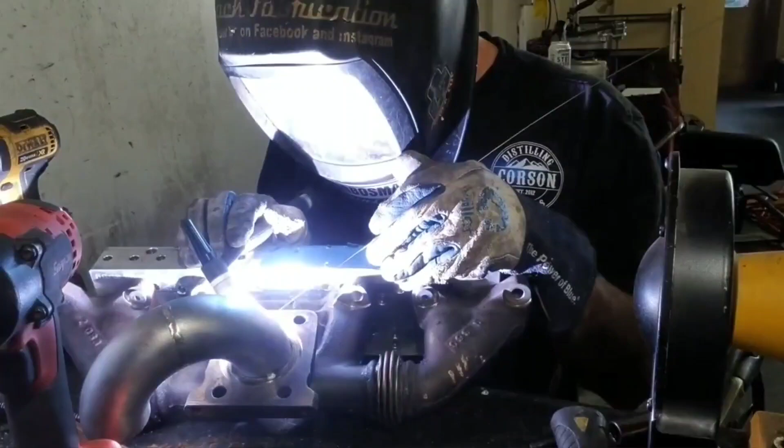A lot of people say lower your car. I say opposite. You need to raise it.

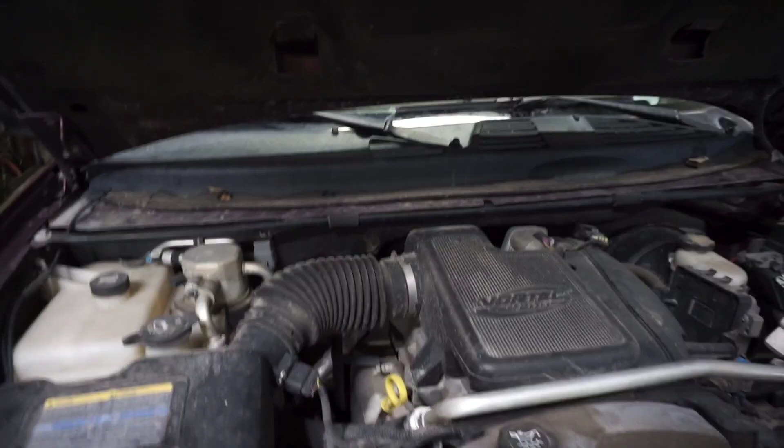Right now, what we're gonna do is get this thing prepped, get the exhaust off so that we can make the up pipe, start clearing out some room. This air box has gotta go. This box on top's gotta go. We gotta get a bunch of shit cleared out so we have room to put our turbo on there. Also need to get the oil pressure line made.

And then I was originally gonna intercool this. I don't know if we're gonna do that now. I think we might just make a pipe that goes from turbo into intake and say fuck it.

You guys ever watch Monster Garage? This whole project reminded me of Monster Garage. I was like, how much I love that show, and when I was a kid I just wanted to do shit like this. So I'm pretty stoked, honestly.

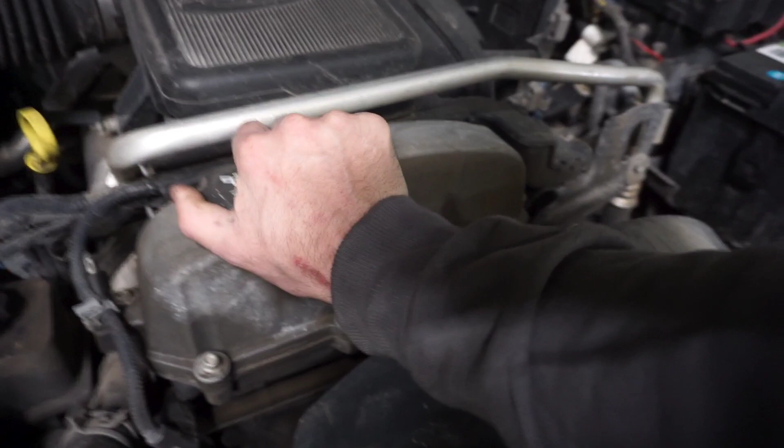I do have a couple ideas for the oil return. I'm almost thinking that I mount the turbo up above this and then just drill into this oil cap and have it drain back into this. So that's a definite possibility.

Or could punch a hole in the side of the oil pan, but then I'm gonna have to drain all the oil. I'll go get more oil, and then hopefully none of the shavings get in there, but a pretty good gamble. Anyways, let's get this thing prepped and get it squared away so that we can start fucking doing shit.

Today on Monster Garage, the guys have to create this piece of shit into another piece of shit in less than 8 hours. Oh, and that's the deadline. We have like 8 hours. Yeah.

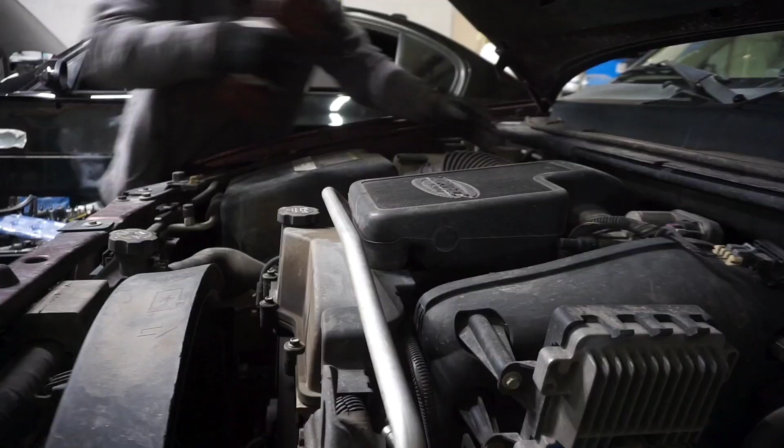So I went ahead and popped that air box off, and bam! Fucking Spectre performance under here. We were fucking making crazy power already, didn't even know it. Okay, I got the turbo manifold off. That was a fucking complete bitch.

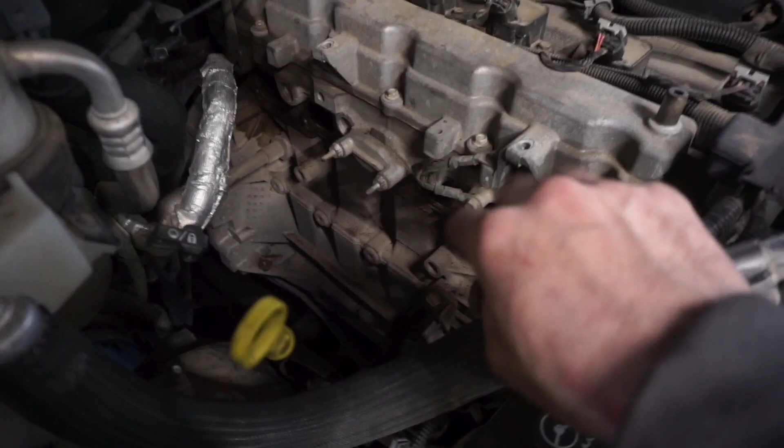We ended up actually removing the windshield sprayer as well. I think we're gonna mount the turbo right about here, like I was saying, pull the hood and have it drain back into the valve cover top of this oil fill. We are gonna have to make like a pretty janky throttle body to turbo setup, and then the oil line's gonna have to come all the way down here. I'm not sure what we're gonna do for the wideband.

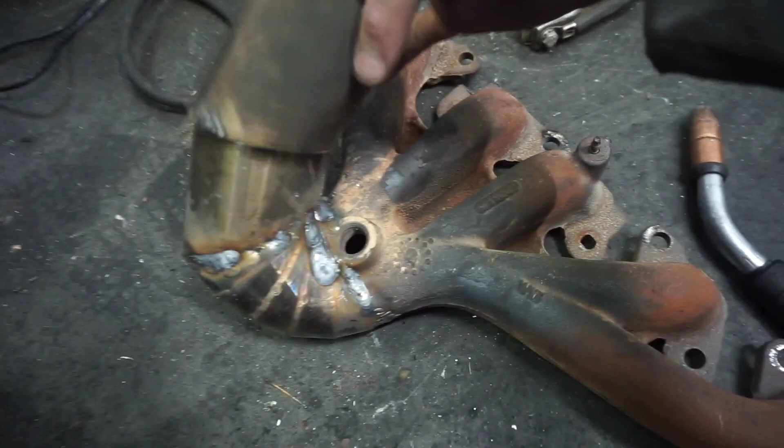I did start welding up this. It looks fucking awful. This is what ghetto viral shit is all about. Making crazy over 90, 180 degree bends that go to other bends that go to pie cuts, and yeah, some hella haggard shit. Looks fucking sick to me though.

I'm pretty stoked. I really wanted to do this thing as cheap as possible because it's obviously not gonna stay like this, but for fun and try and see how fast we can do it. I've actually only been here since 6:30. It is now 9 o'clock. I've already got a pretty good start going.

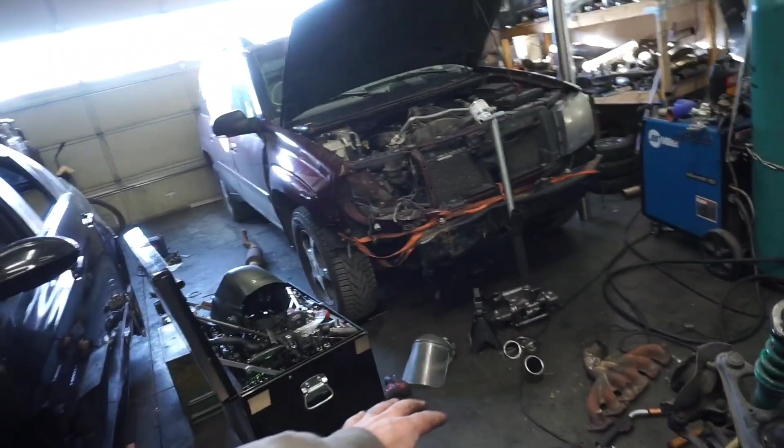We are gonna end up using this HE351. I was originally thinking about using that really nice Precision that showed up the other day, but I think I'm just going to run this and make it work. I do have an idea for this, and the outlet, though, it's going to be pretty bitchin'.

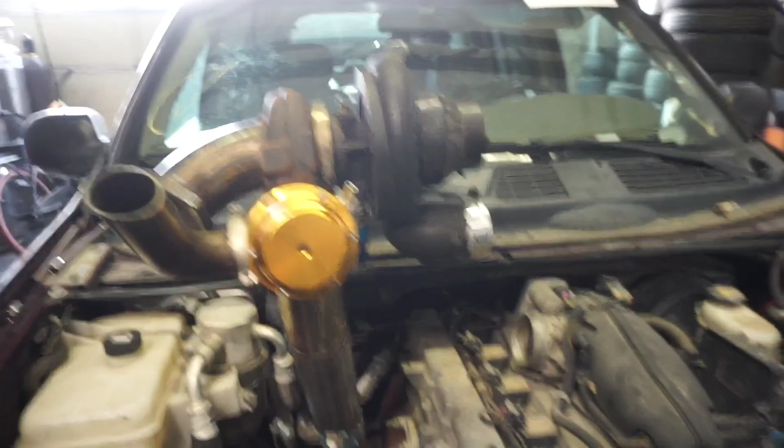All right, guys, I got this pipe all welded up, and I got the turbo mocked up on there, and I think you're gonna be pretty fucking excited. Blam! Oh, Lord. The Trailblazer. This thing's gonna be fucking hilarious.

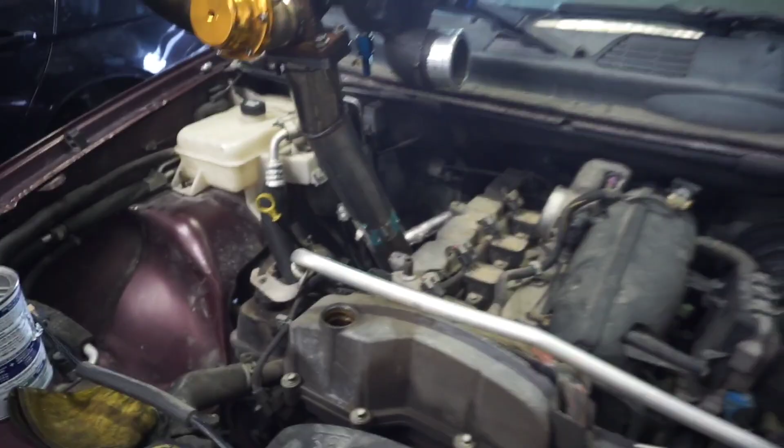I'm gonna end up having to weld a brace from here to somewhere, and then the oil drain, like I said, is gonna go from the oil drain out of the turbo right into this valve cover. So no tapping or drilling of the oil pan or anything like that. We'll be able to just cut that little return cap wherever I set it, and then put it back on there. What a ridiculous setup.

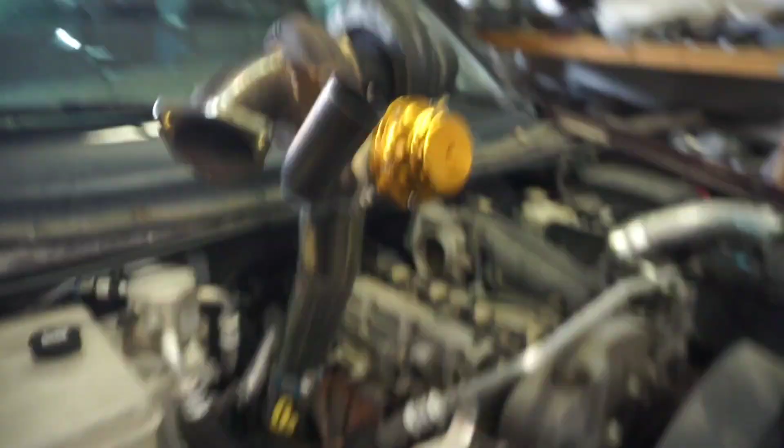Obviously, this is not going to be permanent. This is just for fun, but I'm looking forward to go trying to dyno it. Eric's about to be here, though. He's going to come over and try and set up the tune and everything. Try and get everything squared away so we can actually drive it. It's going to be fucking hilarious.

We have progressed. Eric is here. Greetings. And as he just mentioned off camera, the Civic battle is fully on.

We actually have numbers for the Civic, and they're laughable. It's 200 and something horsepower. Is that what he said? I think 220. We're about to crush his hopes and dreams.

Ended up making an oil line extension. I found this piece of stainless hard line up in the attic and made this. The oil pressure sensor, I don't think I can zoom in.

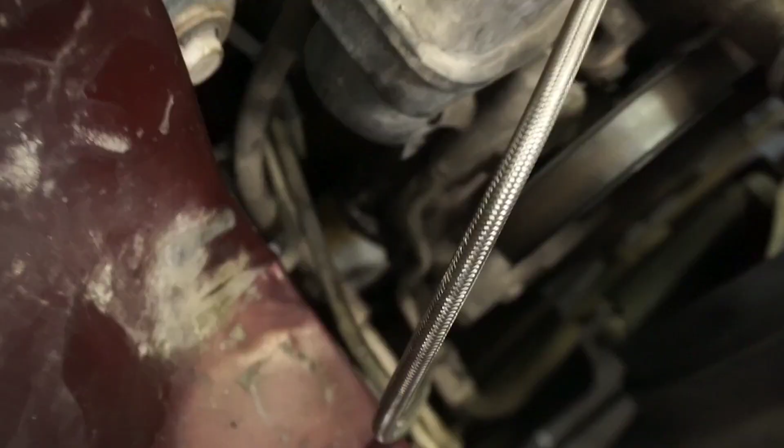To be fair, I think we have the Civic beat naturally aspirated already, so all we can really do is gauge percentage gains. Yeah. Maybe? I just want to make choo-choo noises and thrash him. Right. Well, we'll have plenty of chooch.

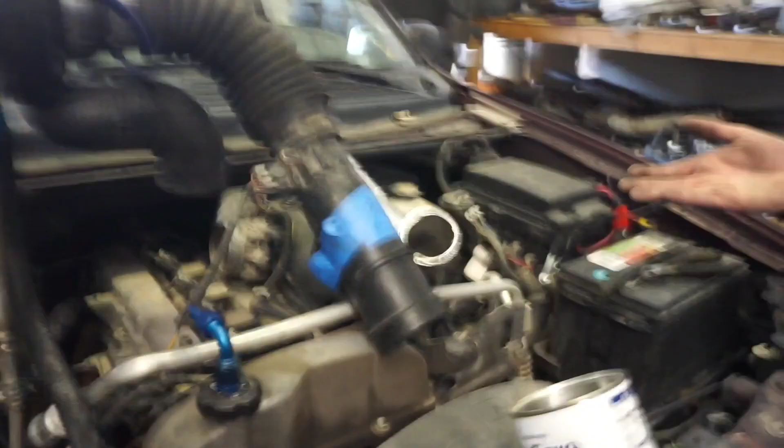Painter's tape. Yeah. We had a little sealing issue on this intake, and we want to keep the honeycomb because, you know, we're all about performance and flow. And well, you need the air going through the MAF sensor to be straight. It needs to be diffused. Correct.

Last thing on the list is make some intercooler piping go down to there. The big issue with that is the throttle body is like 3 1/4 inches. So for whatever fucking reason, some asshole somewhere made that. But I actually kind of have an idea. If we heat up that coupler a little bit, you think we can slide it on there? Try and get this coupler on.

And we also drill a hole in the cap, and we're gonna go and get some 2-part epoxy and epoxy this in there, and our drain line is pretty much done. Good. And the computer is already reflashed. We got the file pulled with HP Tuners, and then I made a couple of changes and already reflashed it, so that's set to go.

We're gonna use the stock injectors and see if we max out. They're like 30-pound injectors, so we're gonna be right at the limit on like a 5-pound spring. So we'll see if it runs out of fuel or not, but hopefully we should be right at the limit.

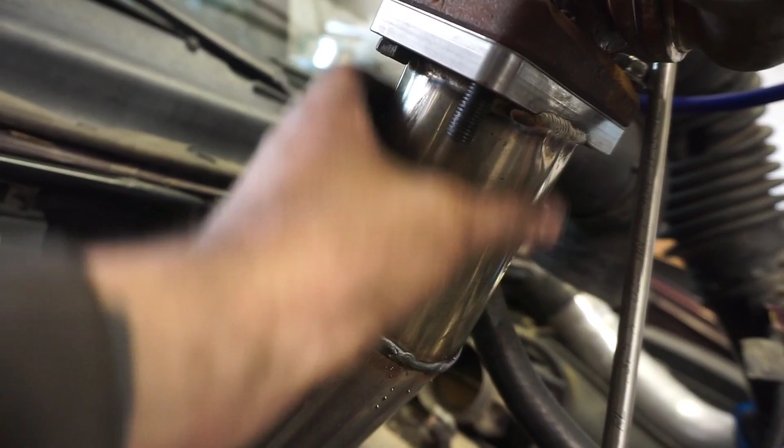Diesel Holset turbo for the win. At very far below the efficiency range of the turbo. Yeah. Well, and we also have this sweet setup that goes from 3-inch and pretty much a wall in here because I didn't port any of this into the T3, which is only about this big. So efficiency is not going to be a thing.

We're gonna want to run like 30 pounds, and we're pushing 5. So it's got this tiny ass little housing and a 4-liter gas motor. It's gonna be like. Yeah.

See this? Did you see what I did with this Chinese gate? I didn't even use a V-band. I welded it right to the flange. Yeah, well, why not? It's a $50 gate. It's a one use thing. Right, one and done. And you can still change the spring, so who cares?

You know what? In the pictures, it looks like it has way more room than it does. It's actually pretty tight in there, and unless you deleted the AC lines and rerouted the coolant lines for the heater, there's not as much room as I would have thought. I think there's more room on like a JZ car, honestly. Right. More free space to work with.

Well, shout out to Shane Rolfe, because he's winning in the pretty department at this point. Oh, is that the guy that built that manifold?

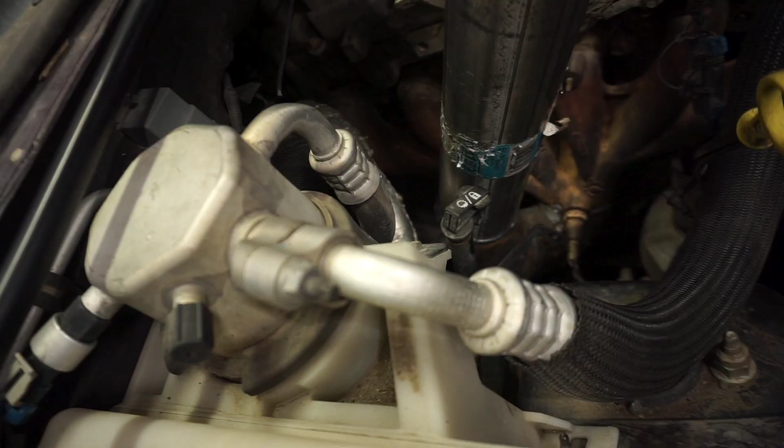We'll make something really wicked for this, because if this is a usable thing, it would be cool to have another one of these that isn't a total pile of shit and have a pretty decent size turbo on there. I also want to see how far we can push everything else as far as stock injectors, fuel system. If we're good at 5 pounds, then we can move it up a little bit and see how far we can get, and then obviously address the manifold situation. It's hilariously bad. I do have the capability of making some absolute fucking garbage still, so that's good.

All right, so we got the narrowband back in. We're gonna hold off on the wideband for right now.

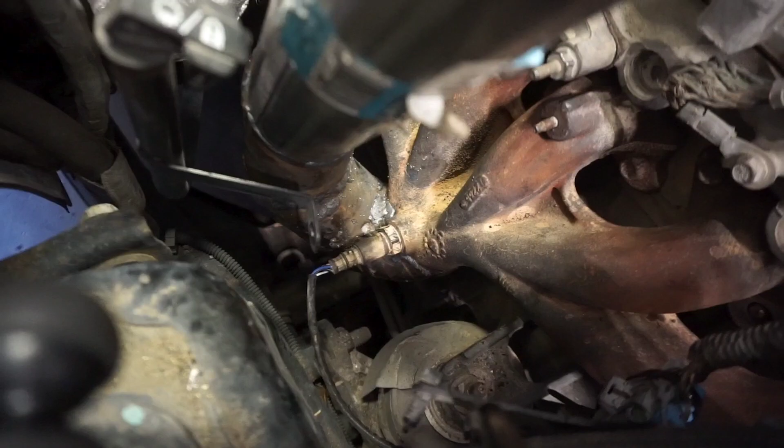Maybe when we get to the dyno, we'll put the sniffer in and make sure that we're ready. But essentially, we need the narrowband in for the fuel trims to work correctly so that the car will be drivable. And then we'll get the wideband installed later. Whether or not it reads lean or rich, you could tell whether or not it's gonna be good, pretty much.

Yeah, so basically what we're gonna do is make sure that we get into power enrichment and that we're above what the narrowband is going to be able to read, and then I'm going to add enough fuel to make sure that it's safe. We have the timing adjusted correctly so that it should be totally fine up to 5 pounds, and then I'll just kind of pull fuel a little bit at a time to make sure that we're not knocking, make sure that we're not going too lean, and then I'll just use the feedback from the narrowband sensor to make sure that we're not coming inside of like 12.5, and hopefully all of that still works with the 30-pound injectors that are in here stock.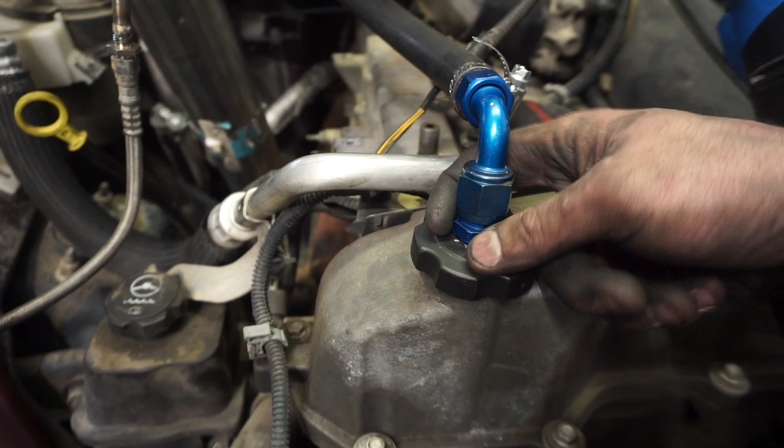We clocked the turbo a little bit. We still have to go ahead and epoxy this. When we leave here, we'll head over to AutoZone and get some 2-part epoxy, because this thing pretty much sits in there already. So put some serious epoxy on that and it should be good to go.

And we have this set up still with the stock MAF sensor. This is an 06 Trailblazer, so it needs to run on the MAF sensor. HP Tuners has not released an operating system that allows us to switch to MAP sensor only. So right now we're limited to the MAF sensor, which should be totally fine for right now.

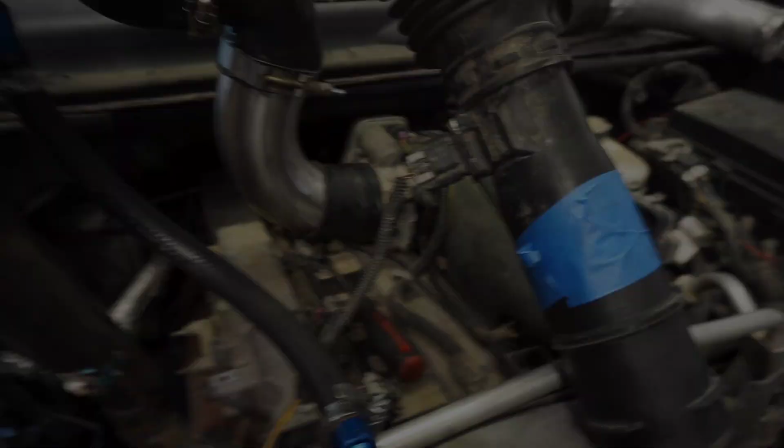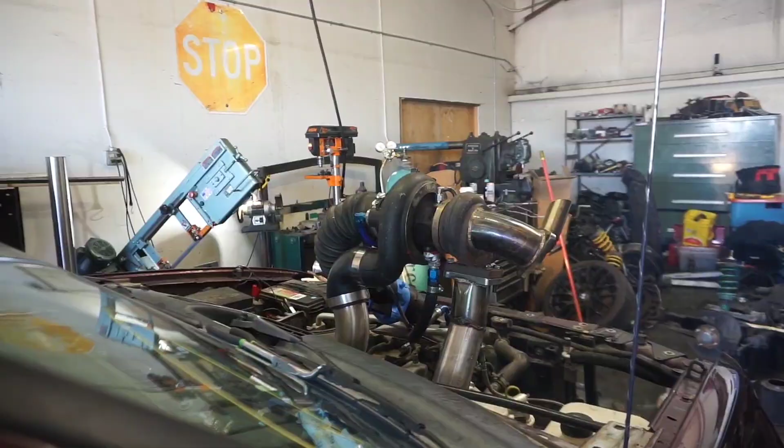It's alive! It's alive! So I think when we started it up just now before we were on camera, it was making this awful tinging noise. And what I think it is, dude, I think there were little pieces of slag in the pipe and they blew up out of it. Yeah, so it was just sitting there going ding ding ding. It sounded like an empty aerosol can with something rattling inside of it, but it's cleared out. So it's good. It's way good. All right.

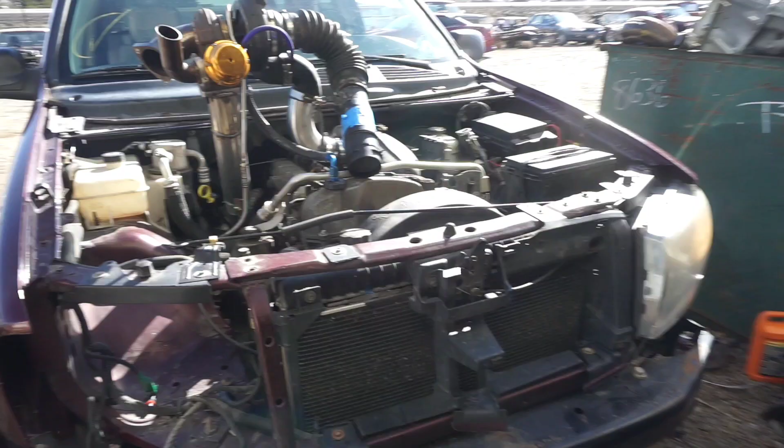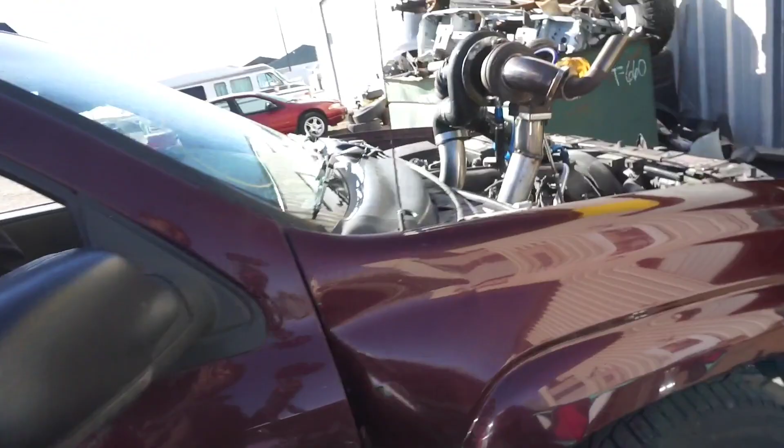Fun, it's gonna be zippy. Zippy. It's really good. It's really good. It's everything that I ever wanted it to be. It is just, that's pure enjoyment right there. That's hilarious. It's like, oh my god, it's gonna be a good day.

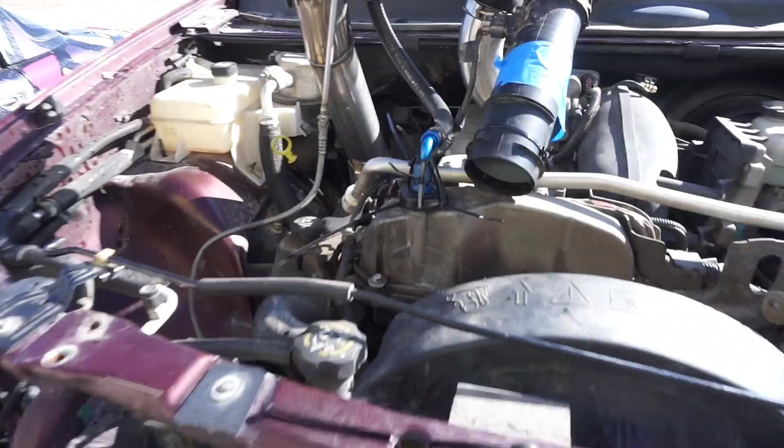So we were wondering how we were gonna seal this up, but this is obviously what you do. You just create a zip tie collar, and then where's she going? She ain't go. Dude, that's tight as fuck. Way good. Not under pressure. It's just draining a little bit. Good. Yeah, it's not going to move. It's done. Realistically, that is not the worst thing on here. That down there is still the abortion.

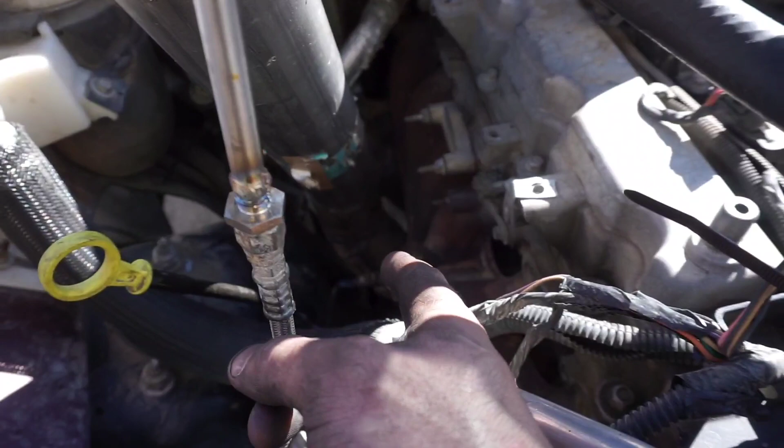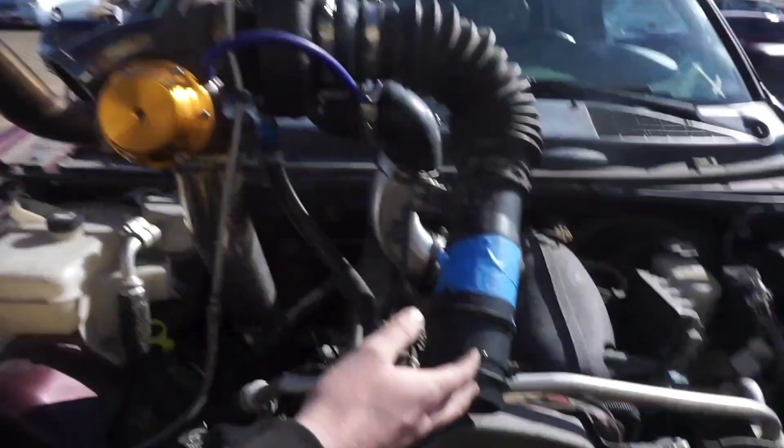This is scientific. So far everything's working. The factory O2 sensor is still working, even though you broke the connector when it came off. That's not my fault. The MAF is reading a little bit choppy at idle. I don't know if that was because the MAF sensor was bad already. I don't think it ever was good. Or if it's because of our immaculate engineering here. I don't know if we have any airflow chopping through because of this tape. We might want to upgrade our tape a little bit, but it's fine once we have good airflow.

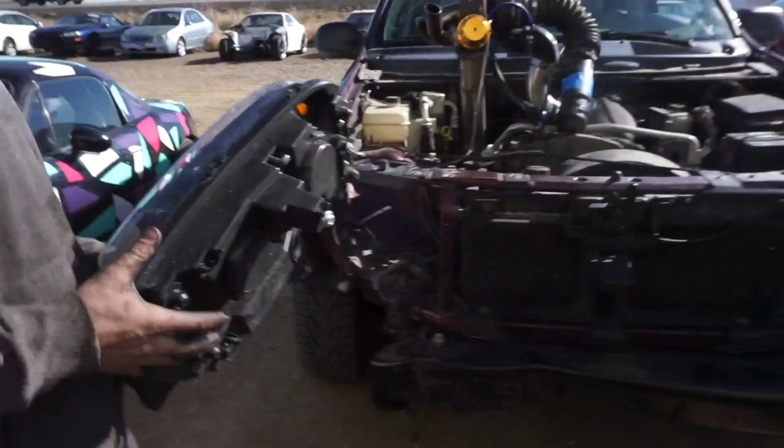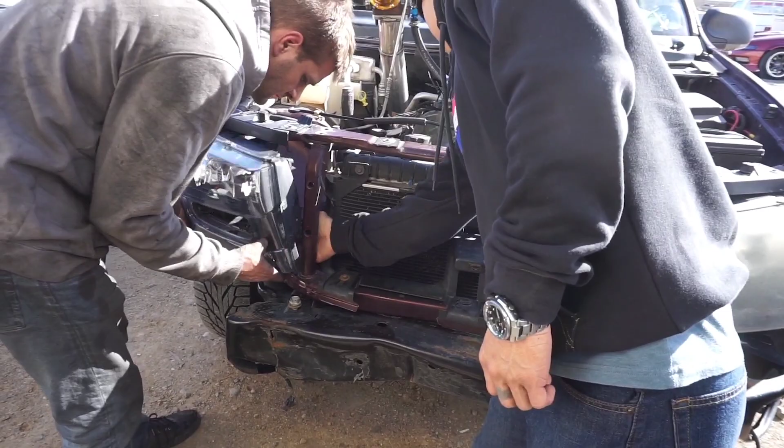I'd get in this and drive this to Vegas right now. I would go smash on it right now. Well, let's do it. Let's go smash on it. So I just feel like it doesn't matter how well it works, as long as it looks good. That's what's important. Can you just hold that for a second?

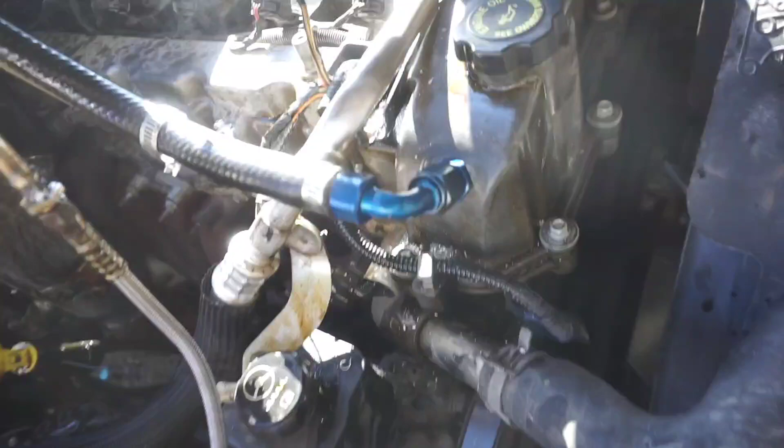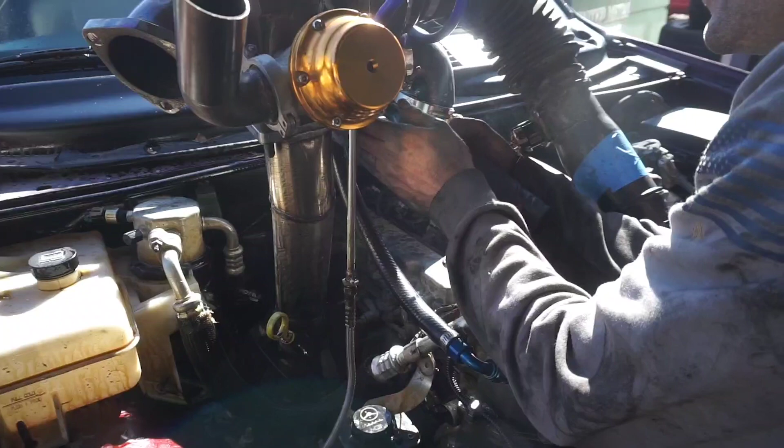Oh, you know, let's just admit it. The zip tie ring of fire did not hold up. As unfortunate as that is, the only logical thing was to leave the valve cover on and drill the valve cover out. So see how much of this little debris got in there, but it's gonna be fine. Watch, it runs for 200,000 miles again. It actually sounds kind of sick. It sounds a lot like a JZ to me.

All right, we're heading up to Emmett to the dyno day. This thing's fucking hilarious. We got tons of looks already. I'm excited to totally be a meme. So let's see if we can make it up there without getting arrested. We got that oil drain all squared away, and Eric went ahead and tuned it. So I think we're good to go. We're also gonna be rolling up there with JP. He's gonna be bringing his JZX up there, and yeah, should be a good time. That trip, bro.

We have to add an addendum to the chemtrails video. Oh God. So we made it. Yeah, we have arrived. This thing drove 1 hour on the highway. It did not grenade. Right. I was also in a different vehicle, so I wasn't able to data log, so I'm kind of curious what happened there. I was butt data logging, and it broke up a little bit under some load at one point, but it was actually not too bad.

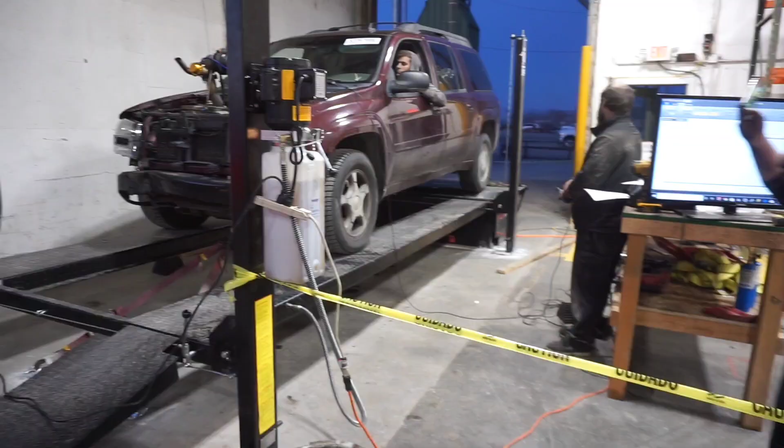It sounds retarded. Yeah, it does. All right, I can't get it to stop shifting, so Eric's gonna give it a try. See if he can get it. He's a lot more experienced dyno operator than I will ever be, so. What do you think of overall sound though, impression? It sounds quite loud. Pretty retarded. Yeah. Oh dude, 80 horsepower, dude. Oh, 192. 70, 80, 80 miles.

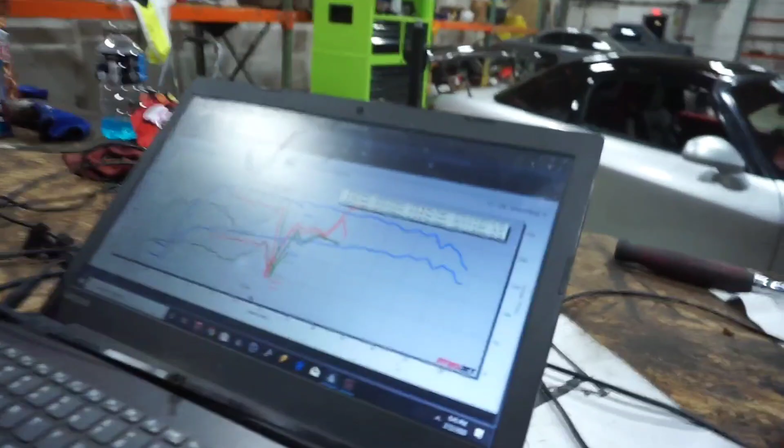Got it that time. Like, the fact that I drove it 80 miles and then it ran on the dyno and didn't explode just now, that's a huge win. Yeah, like it's an accomplishment. The fact that it produces over 150 horsepower. I guess. It's still slower than Braden's Civic. Didn't make what I thought. No. Well, if you look, looks like it could probably use a degree or two. But you can't put any more timing in it because the injectors are 130% duty cycle, so. Yeah.

Speed limiter eliminated. Sweet. See how this goes. It's gonna make a whopping 200. Depends on how lean it is. It's lean as fuck. We don't even have a wideband. We're guessing. We're like, yeah, it's pretty lean.

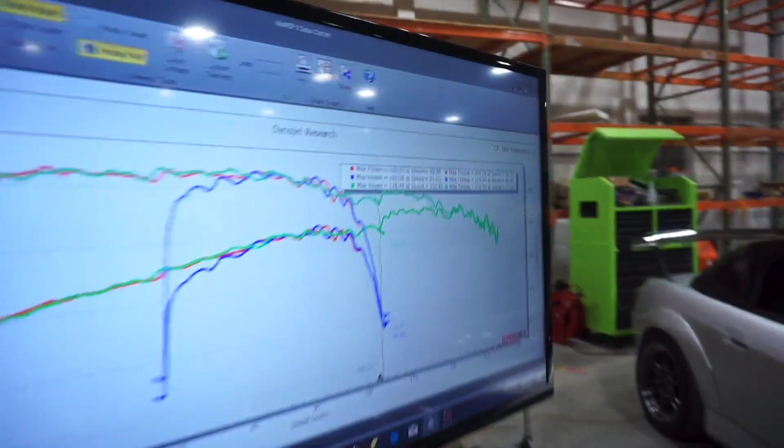No, I don't think so. I was too busy laughing maniacally. I didn't see him either. Oh, fucking funny, dude.

We definitely need to get some fresh plugs and gap it down because it's getting very upset about misfires. Oh, right, yeah. No, that's what I'm saying. When I was under load uphill, it was like not thrilled. Random misfire, cylinder 4 misfire. You can see it in the graph. Like, blah, blah, blah, blah. So, proof of concept spinning. Now I can do as fast as I want.